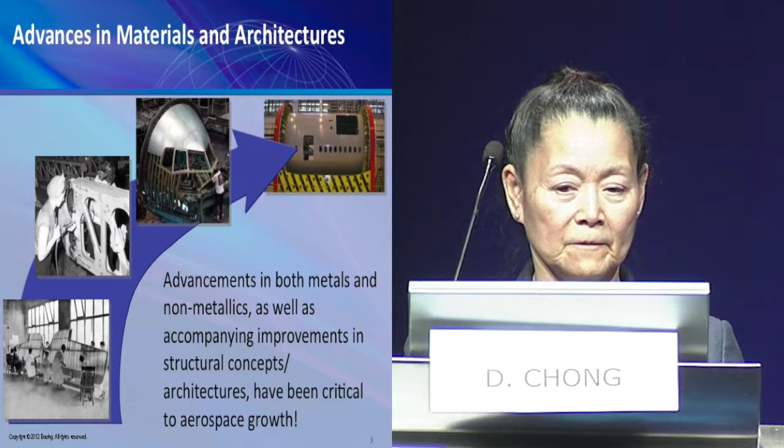I spoke a lot about the 787 last time. This is a great example of how the composites materials have driven a lot of the manufacturing technologies that we have advanced in. You cannot look just at the materials systems by themselves, but you have to look at how you actually fabricate and then assemble these things together, and this drives the other material systems on the airplane as well, or on the various products that we use, because of the interface concerns between the different materials.

Some of the advancements that we're looking at now are what are the next generation of material systems that we should be investigating. What are the things that can eliminate the autoclave and improve the productivity and the flow through the plant for our different parts, different material systems, how can we combine those better?

This is a challenge for us because we rely a lot on our suppliers and partners to work with us on this, because we don't produce resins or the reinforcements ourselves. We rely heavily on suppliers for that innovation, but we help them with the advancements by providing the requirements. We're also looking at advanced thermoplastics for many of our systems, and how to prevent microcracking for space systems as well.

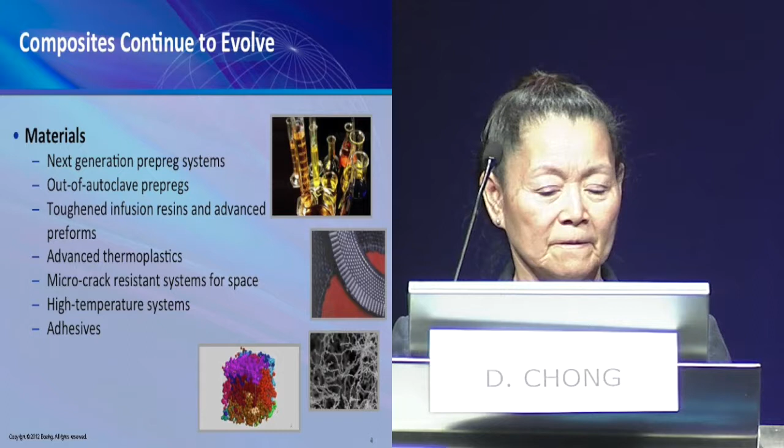As I said, we have a variety of products with different requirements. In addition to this, many of our military systems and space systems require very high temperature systems, in addition to the relatively ambient systems that a regular commercial airplane requires. And then, as with anything else, in joining these materials, what are the right adhesives? So we relied on the chemical industry.

As I said before, we rely on a lot of processes to help us form parts as well as join them together. There's a lot of lamination systems as well as advanced forming systems that we have to use. We look at bonding systems, co-bonding systems. How can we do this?

A big area is repair technologies, because as we deliver the products—and earlier today people talked about manufacturing and services—there's a huge service industry even after the product is delivered, where we help and provide technologies for the maintenance of our products after they are delivered. Certainly repair is a tremendous area in the composite areas. It's relatively understood in the metals area, but there's a lot yet to learn. It is something that we consider under manufacturing.

We look at advanced tooling as well, and what can be provided, what are the things that are needed in order to survive the multiple cycles that we have to undergo with these materials, as well as more sophisticated and quicker inspection systems that can be used with large monolithic parts.

Design and certification is something where we have developed a lot of tools with the help of some of the other people who have been presenting today, to help us predict flaws, understand the materials, and how they can be used, so that we can better design to their capabilities.

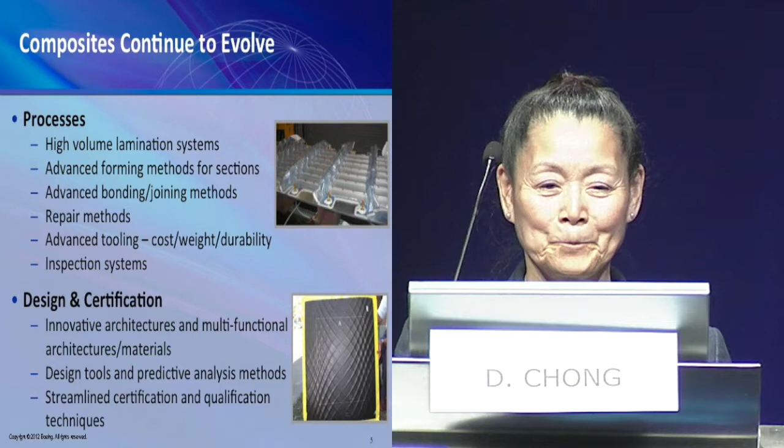Another area that can't be neglected is the metals area. It's very important to us. When I talked about the 787 earlier, people always assume they call it the composite airplane. It's 50% composite, which means that 50% is other materials, including a lot of metals, as well as the other chemical materials that are on that airplane.

In looking at what we need to do in the metals area, we are engaged in investigating new alloys, new ways of forming metals, including additive manufacturing. I was very pleased it was mentioned this morning, because we are looking to really push the envelope, and using the definition that we used earlier, we really want to be excellent and team with others to be excellent at additive manufacturing, and not just be good at it.

Because of this, we are targeting building larger pieces, larger sizes. We saw an auto body this morning—we'd love to build something bigger than that. We're looking at using more advanced materials in AM, understanding the process control and the feedback with respect to this type of manufacturing, and also everything related to any of our other products: understanding the reliability, the producibility, and how to maintain these items.

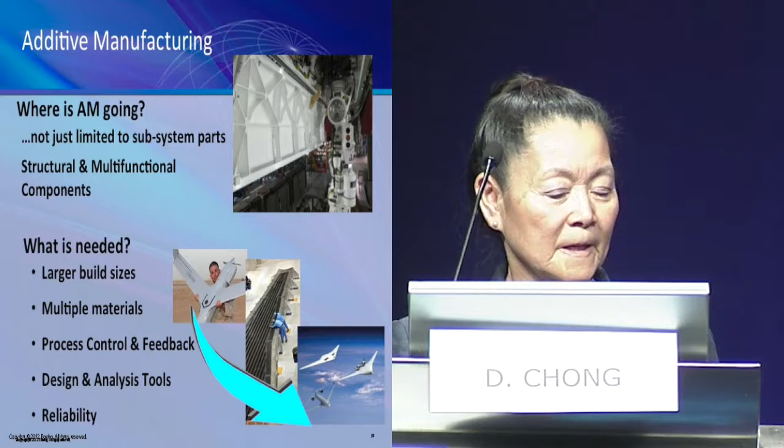A very important part of what we do as a large-scale integrator is understanding what our factories need to look like. This is the gist of manufacturing for us. We can fabricate parts, but how do we join them together? I saw some excellent booths that describe exactly what the future of manufacturing needs to be for aerospace engineering. We understand what it used to be.

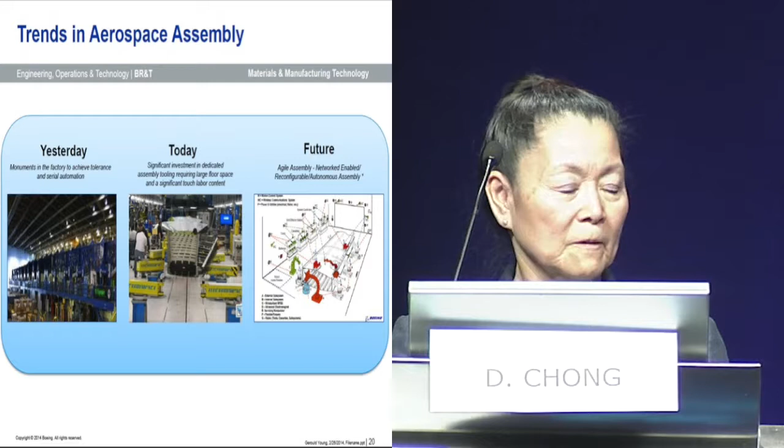Today we are integrating automation where we can and understanding the needs. We are also simulating what the future needs to look like. We're using a lot of simulation today, but I think the big step for aerospace or for any other industry is understanding how automation can best be used.

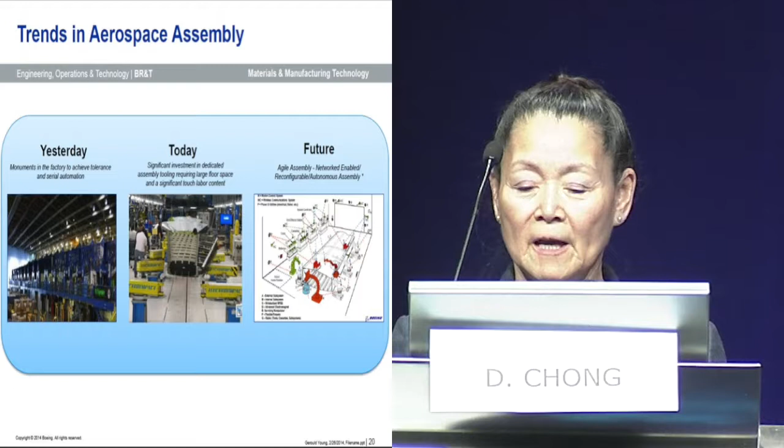Right now we're looking at how we can use automation in the factories that we have today. For the future, we need to design the factories and the build systems, and actually even redesign the parts so they can utilize all of the advantages of automation for the future.

We go through various technology maturity levels with the materials and the fabrication process themselves so that we can optimize and filter out the things that will not work for us.

Finally, we do computational modeling to determine what the future could look like, how we might utilize these to make actual parts for our products.

And then we take that and build it into, also model it and start to build prototypes of the subcomponents. And finally, at that point, we decide how will we actually fabricate these parts.

We've used some of the tools that you've heard about before to understand, is it a make or a buy, or is it something that we should design differently?

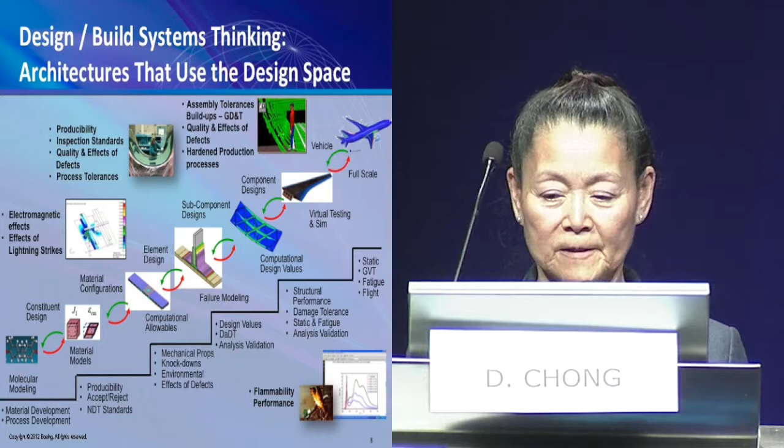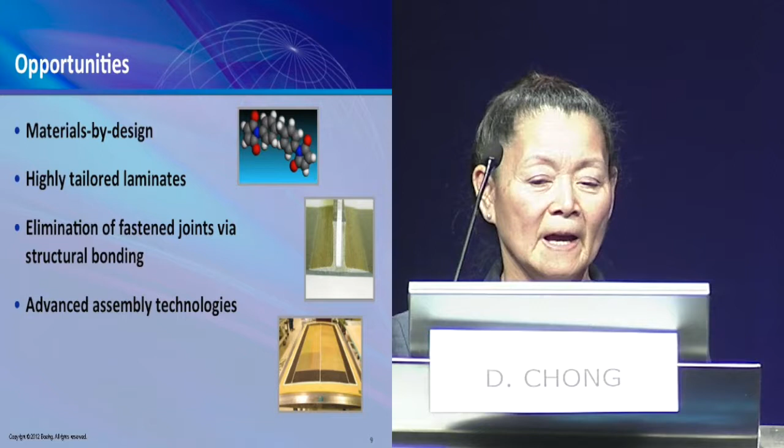So the opportunities for us, where we need innovation, is materials by design. First of all, going back to that first part of starting with materials, can we design the materials and can we take advantage of what we know from nature, from the materials that we have today, and do better designs? We're actively working on that through simulation and testing of prototype specimens at this point.

How can we tailor laminates for the composite materials so that we can certainly take advantage of these properties? There's been a habit, and many of you who may work with composites or non-metallics may understand this very well: people tend to make things, if they've used them in one form such as metal, look like metal as well.

So how do we really take advantage of the material systems themselves and redesign and change our mind of how we redesign? How can we also eliminate certain types of production activities such as fasteners, because it'll save us weight and save us time, and also save us some of the inspection that we have to do with these particular assemblies.

And then the advanced assembly technologies is something that we cannot underestimate, because as a major integrator, or having our primary duty as integration of primary structure, we do have to pay attention and take advantage of the technologies that are out there.

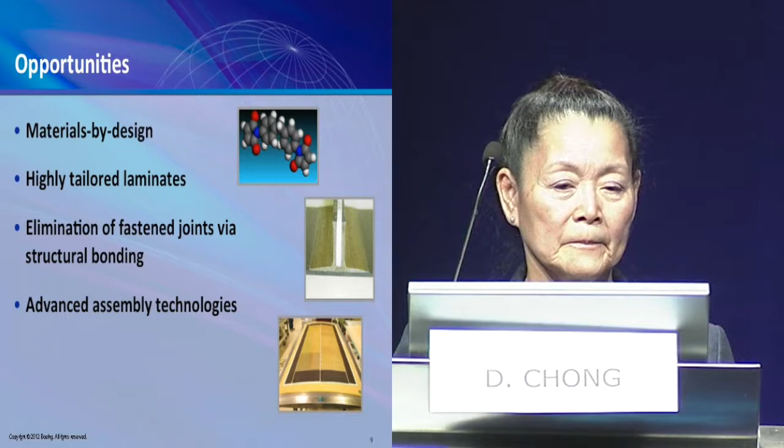So our challenges are focusing on the needs across the full life cycle of any product, from the materials development to the final product delivery, and then even beyond that, what are the services that we have to provide? How do we assemble all of these?

What are the make-buy decisions we have to do? How do we work with our partners and suppliers to get new innovations on the product or in the product floor? We have to look at multiple products.

As I said before, that's a huge challenge for us, because somebody mentioned it this morning, you don't want to just put a lot of money into a niche product. However, some of our products are very demanding in what they need. So how do you manage your portfolio so that you have spent the proper amount of money and development on each of these?

We need faster development cycle time and controlled development costs. That's a major initiative for us. There was a DARPA study that showed that the cost of developing products in aerospace had increased exponentially over time, while in the automotive industry it actually decreased over time.

So we've been studying a lot of technologies and business models, if you will, as to how to approach this so that we too can try to get our cost under control for development. We need a smooth transition to production, whether it's on the production floor or on the product itself.